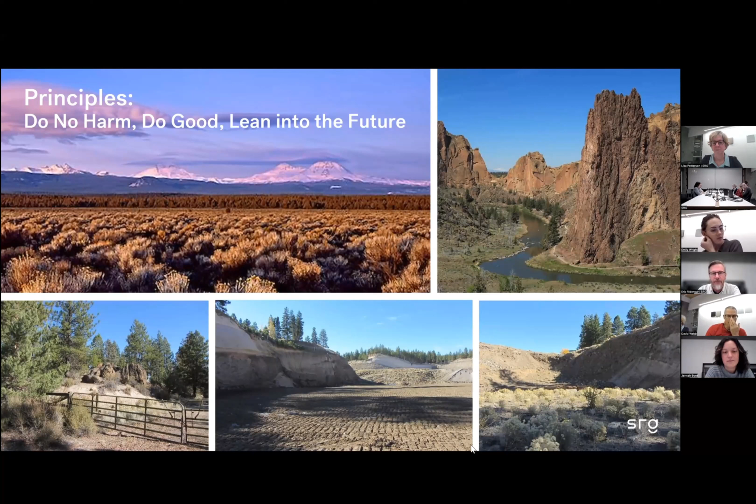I'm going to give you a little background, starting with deep background. Central Oregon, as most of you know, is an amazing place, very unique, very different than the Willamette Valley, both geographically and culturally in many ways. OSU-Cascades exists to be a four-year university for Central Oregon, and it was a long time to get there. I'm going to summarize that story briefly before we get into the specific project we want to share with you tonight. One of OSU's principles is they want to be true to their place, true to the landscape, dramatic landscape you see in the Intermountain West, as well as the site itself, and the images here are representative of both.

So OSU-Cascades has been in Bend since the early 2000s. There were actually courses offered before that by both OSU and U of O. But it's been in Bend as OSU-Cascades since 2001.

But that first decade or so was really just leasing a single building and having a presence on the Central Oregon Community College campus. In the early 2010s is when OSU committed to the West Bend area where the campus is now. They bought one existing building and then started to build this campus.

This is a quick overview of the land housing the campus, which is still growing. It's a relatively young campus in terms of its development as well. So if you think about Bend, it's just west of the Old Mill District and west of the Deschutes River. They started with that little area where you see a cluster of buildings in the bottom corner—about a 10-acre site where the first buildings were built. Even as they were building those, they started to plan through a long-range development plan process for the rest of the lands you see there.

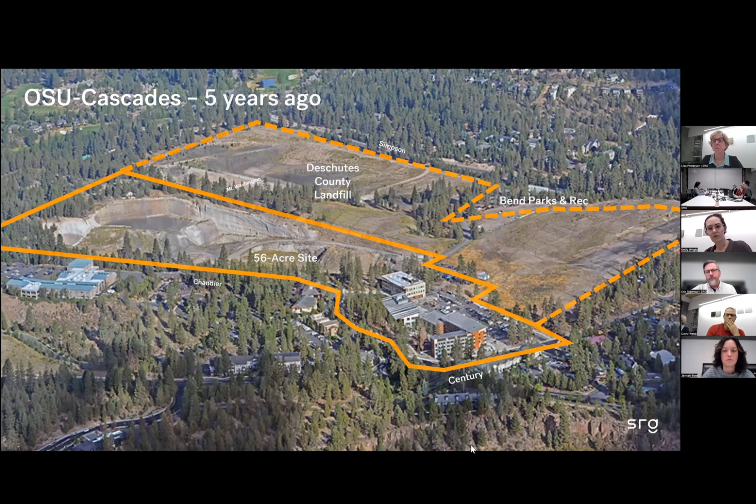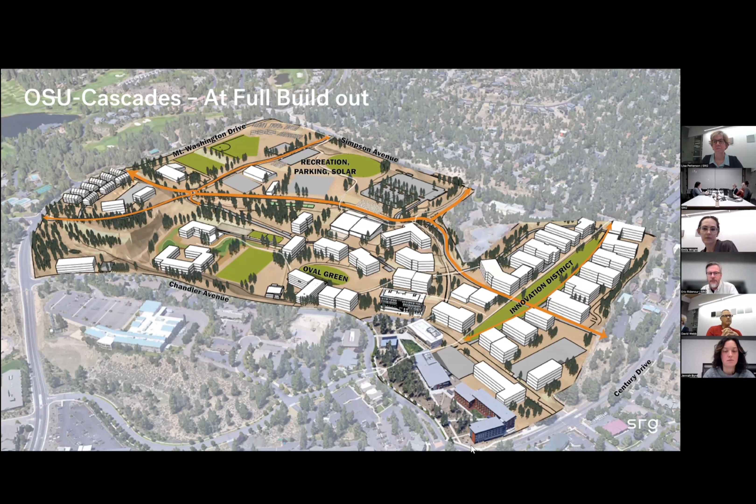This is an image from a similar angle of what the campus might look like as it builds out over time, with that original development in the bottom corner, showing the level of construction it's going to take to house 5,000 students academically and up to 40% of them physically on campus, as well as an innovation district in that right-hand corner.

In the process of working on the long-range development plan—I should say that prior to joining SRG, I was at a prior firm and was part of the team that wrote the LRDP, working with a team led by Page Southerland Page. So I was involved in that part of the process prior to joining SRG about 6-7 years ago.

The two graphics here are both very telling. The one on the left is from a workshop that was all about housing and getting the housing approach right on the campus. The one on the right was about everybody's favorite campus planning topic, getting the parking right. You can't do planning for campuses if you aren't willing to plan for parking. And that was, of course, a concern for the community.

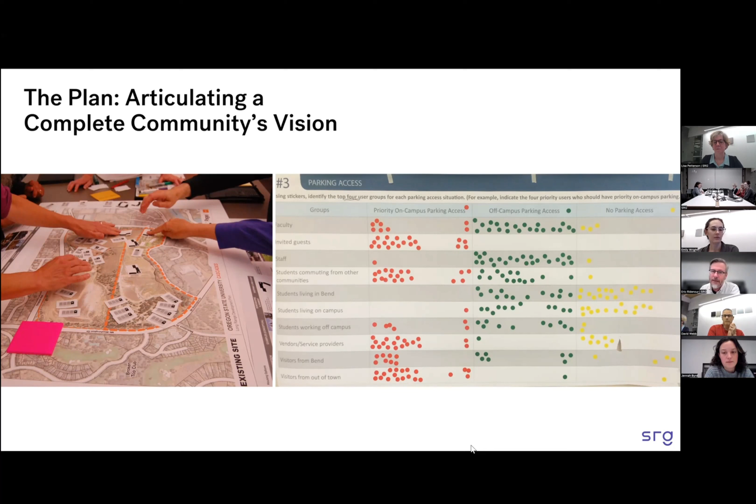I'll just say really briefly, it was interesting because it was a two-edged sword. On the one hand, you didn't want people parking on the neighborhood streets. On the other hand, you really wanted to motivate people to not use cars, so you didn't want to over-provide parking. So a lot of interesting conversations through that lens.

Then there was a robust programming process, which Page really led, to get the program right but not over-program the site. OSU-Cascades continues to want to be lean in their aspirations of how much they build to serve their students.

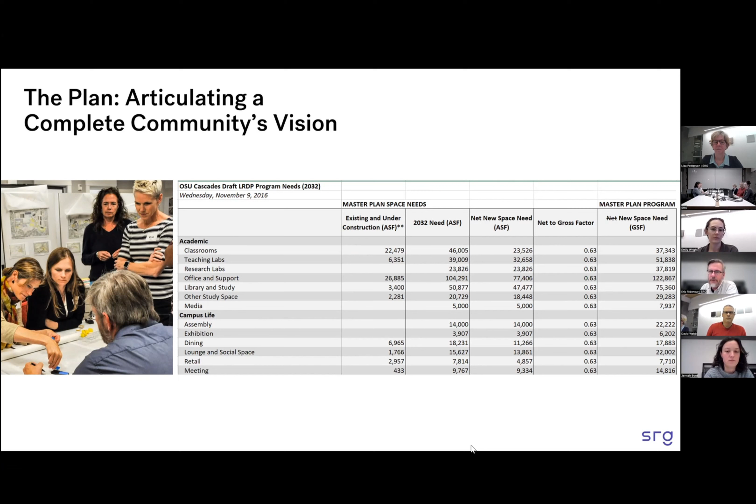They are tracking really well. They sort of adjusted after some post-pandemic trends, like every university has seen, to the point where this fall they have their largest incoming class yet, which is exciting. That was just announced in the last few weeks. You may have seen that.

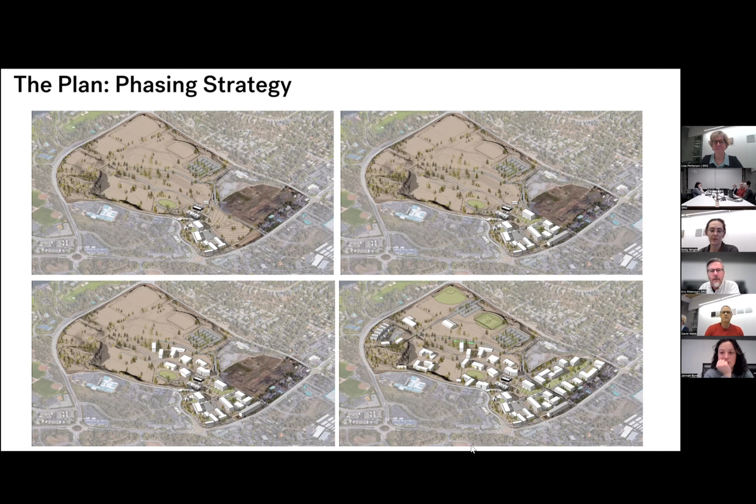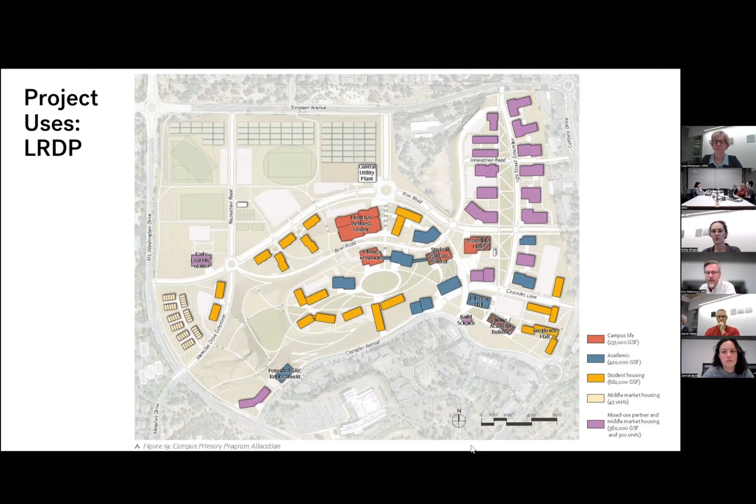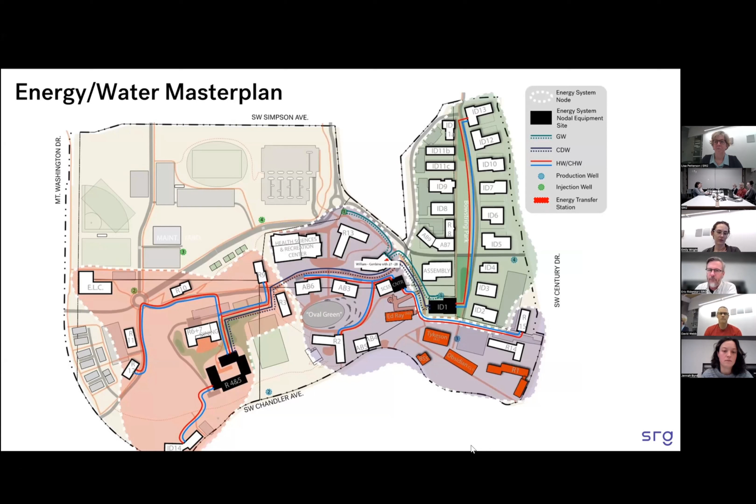The last point I'll make is that they have been very aggressive about what they characterize as their net zero triple goals: water, waste, and energy. They've authored, with Integral Group's lead, an energy study that led to them putting in a geo-exchange groundwater thermal system for the whole campus. The building you're going to hear more about tonight is the first to make use of that. They've also authored a study about what water neutrality or net zero water would look like on the campus, and they're starting to work towards implementing that - for example, introducing purple pipe and systems like that to be ready for water recycling.

At that point, I'll transition it to the rest of the team.

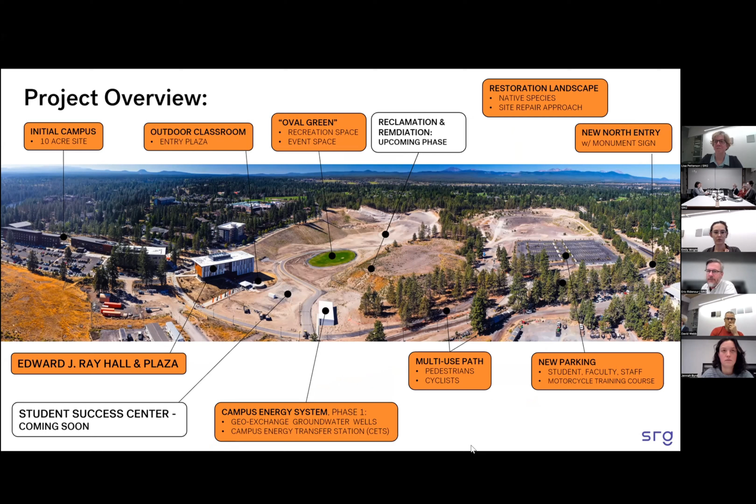Thanks, Eric. So with that background in terms of where we were building and the context of what was happening, I wanted to remind everybody, because many of you on this call might remember, that this particular project came out as a design competition RFP in late 2018, and the competition spanned over the Christmas break and into 2019.

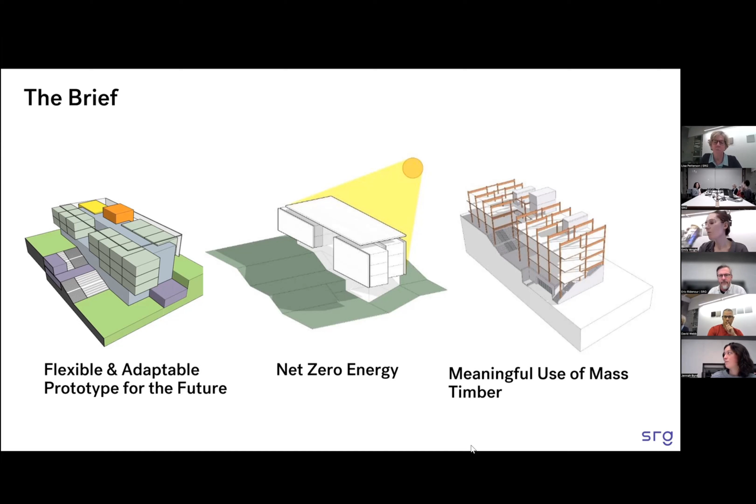The brief that OSU came up with was really around three big topics. They wanted a project that was flexible and adaptable, that would serve as a prototype for the future. They wanted to demonstrate that net zero energy goal Eric mentioned could happen on this building, so it would prove as an example prototype for the campus. And they wanted to incorporate what they called a meaningful use of mass timber - but they didn't really talk in the brief about what was meaningful, so that was always a big question, probably for all of us.

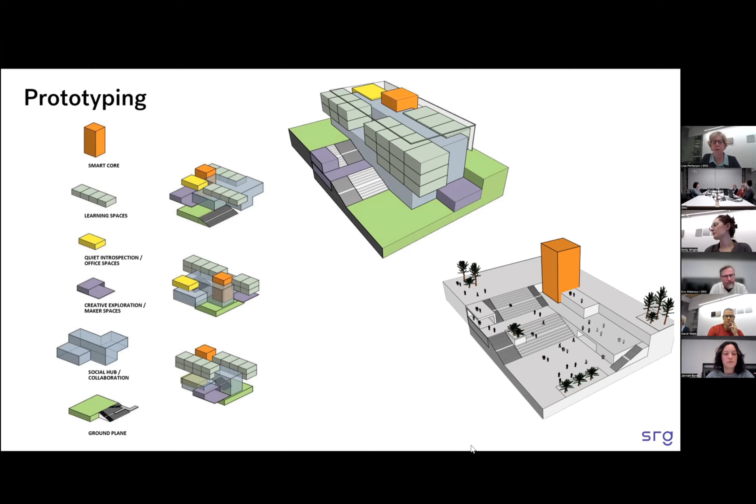So one of the ways we started was thinking about how we could take this concept of prototyping and make sure we incorporated it into that early design thinking we were doing in the competition. This is actually part of that competition entry - how could we think about the spaces that would be incorporated, and how could they change over time? What would be the fixed elements and what would be the adaptable elements?

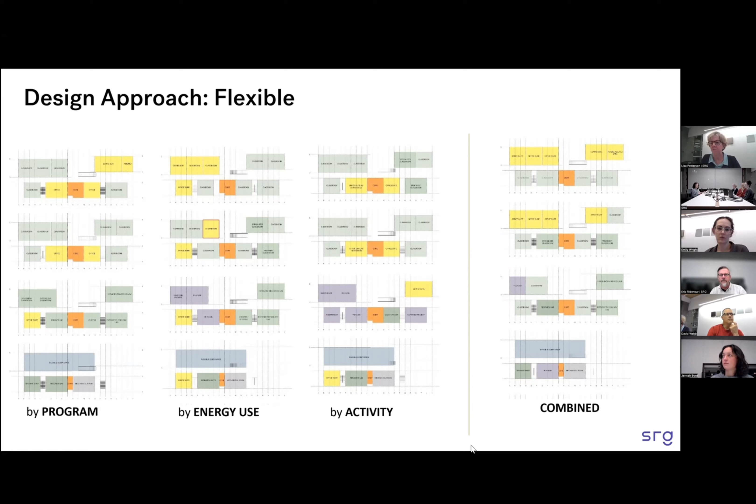We also wanted to take it a step further and think about programming, and how the building blocks of the actual program could be thought of in different ways to take advantage of that net zero energy goal. So this is what the team calls the quilting diagrams - thanks to Jenna for making these. What they're trying to show is different ways to think about how you would program space: what are the adjacencies, do you have them adjacent by program within the facility, do you have them adjacent based on what makes most sense from an energy use perspective, or do you look at it more from activities - what needs daylight and what doesn't. And of course, that leads to the net zero energy approach.

Eric's already spilled the beans about the geo-exchange system that Integral Group eventually led. But at the design competition, we didn't know that was an approach - we just thought it would be a really strong solution, and so we were even incorporating it in that.

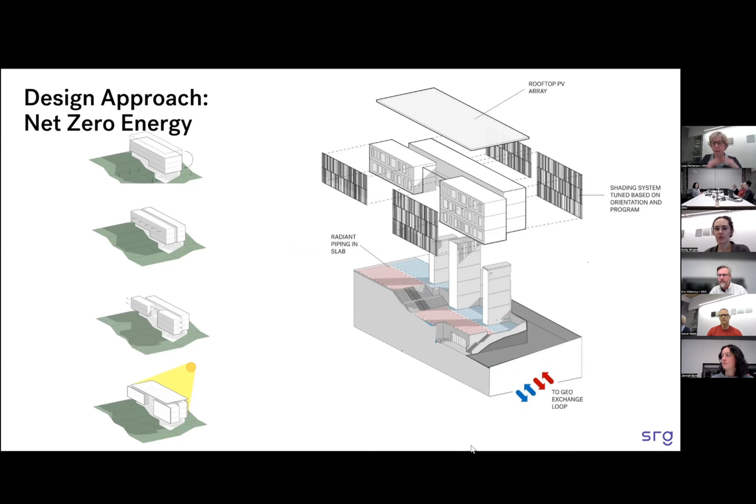Incorporating radiant slabs, looking at how we could have a carefully tuned facade, and of course looking at the roof and what the roof would be able to do to achieve that net zero energy goal. We'll talk more about that later in the presentation.

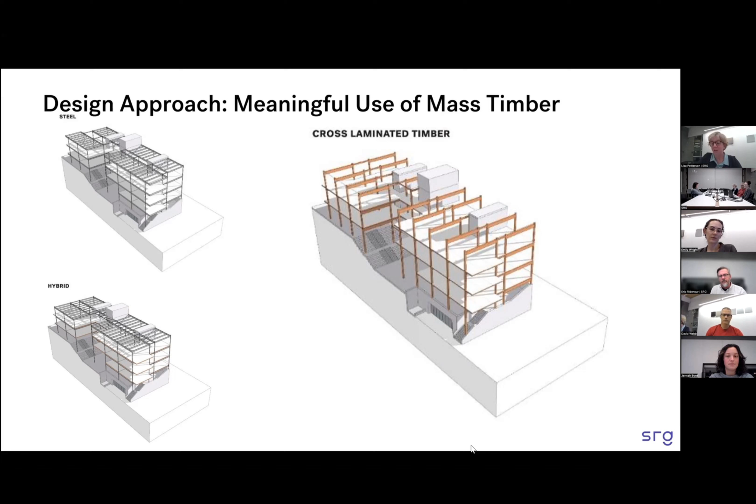I'd say the meaningful use of mass timber was probably the thing that changed the most from our competition entry. We came into the competition thinking a hybrid approach with a steel structure and CLT decking would be the award-winning approach. Shortly after the design competition, OSU went out for a separate selection and selected Swinnerton Builders, and we learned from them that actually the most economical solution, because of the tolerances, was an all mass timber solution. So that checked the box for meaningful, at least for me.

One of the interesting things as we learned more about Central Oregon was how you talk about mass timber in different regions—it varies a little, especially at that time. In Central Oregon, we talked about it supporting the regional economy and the speed of construction we were able to see. We didn't talk so much about carbon sequestration—OSU was interested, but they said maybe don't talk so much about that. Of course, we talked about improved daylighting for users, the idea of a renewable resource, and that biophilic response. Those were important to the users as well.

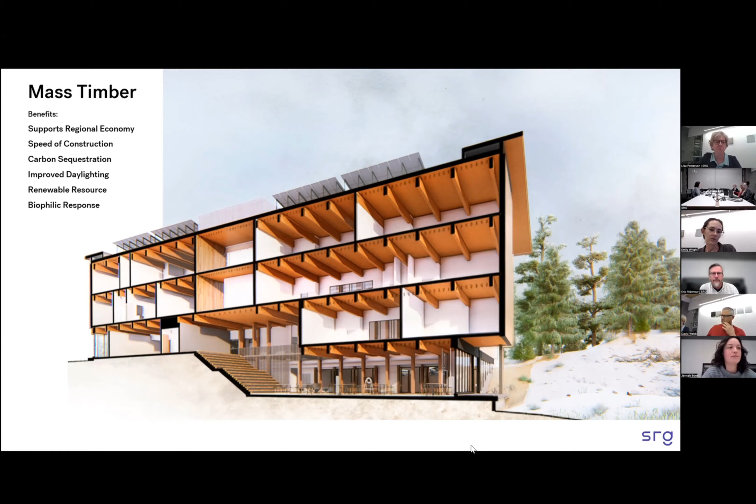Ray Hall was designed to serve the STEAM disciplines—science, technology, energy or engineering, art, and math. The building has classrooms, maker spaces, labs, research spaces, offices, and collaborative space. Like Lisa said, we were designing for maximum flexibility, so the furniture and equipment are all movable or adjustable.

A lot of the furniture is not fixed in many of the lab spaces, which allows us to move things around and think about the future of the classrooms.

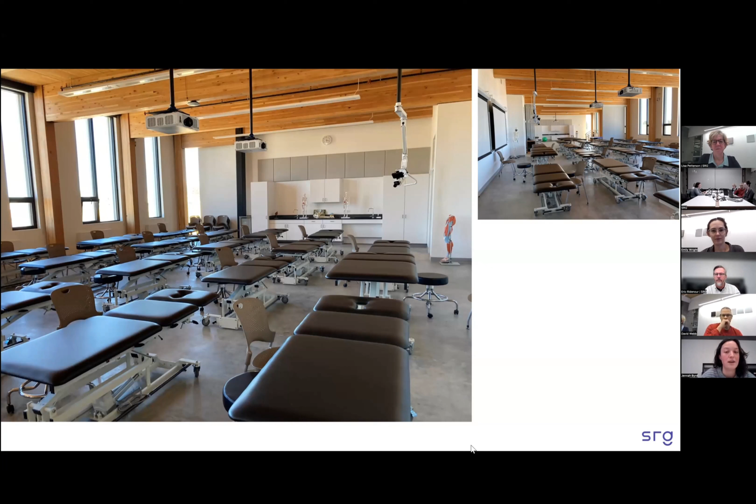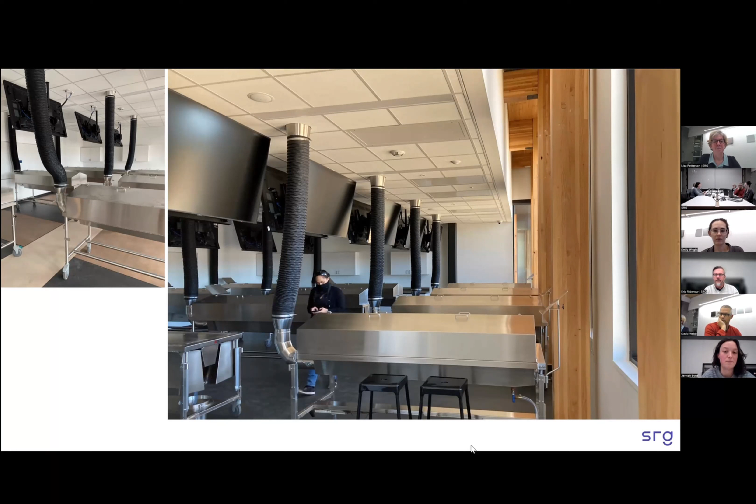This was one of the most challenging spaces to design for, like what Lisa was showing with the stacking diagrams. This space was hard to design for because of the energy use—it was pretty energy intensive, and there were security concerns. So when we were doing these diagrams, we ended up placing it on the top floor to shorten the length of the mechanical systems, and for security, to have fewer people on the fourth floor.

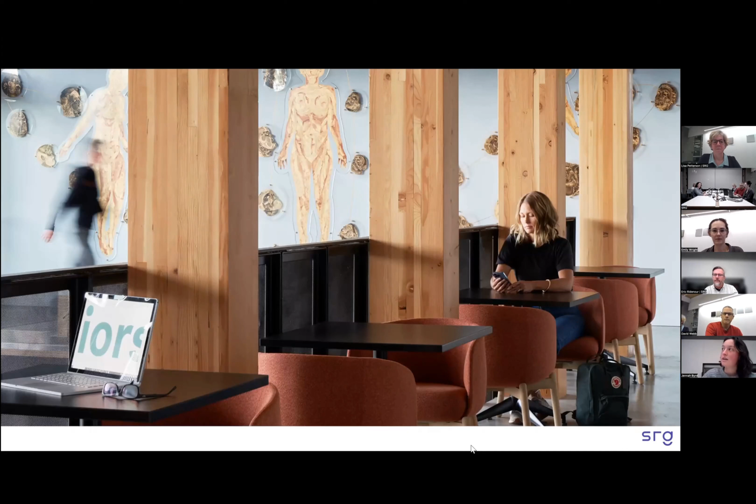This is another one of the casual seating places for people to just meet outside of the offices. There are other offices, but you'll see those later when we get into interiors.

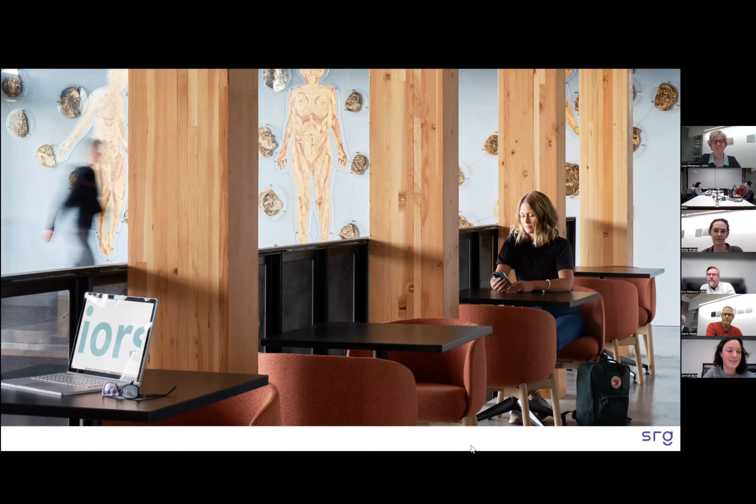One of the things Lisa talked about was the meaningful use of mass timber. We took that initiative to heart, and we were concerned that if we buried the structural columns within the wall, we wouldn't see them. We wanted to pull them inboard, and one of the conversations we had was how to achieve a 3B building, since the exterior bearing walls in the highlighted B column needed to be 2 hours.

So we pulled those structural columns inboard of the exterior wall. They're supporting a cantilevered CLT concrete composite deck above, but the exterior walls are not load bearing. This achieved what we hoped to do, and it also gave us a nice pathway to run utilities for the sensible fan coils between the exterior face of the column and the wall, running the hydronics through without having to go around the column. It was a pretty slick way of moving one little element to achieve what we hoped for aesthetically.

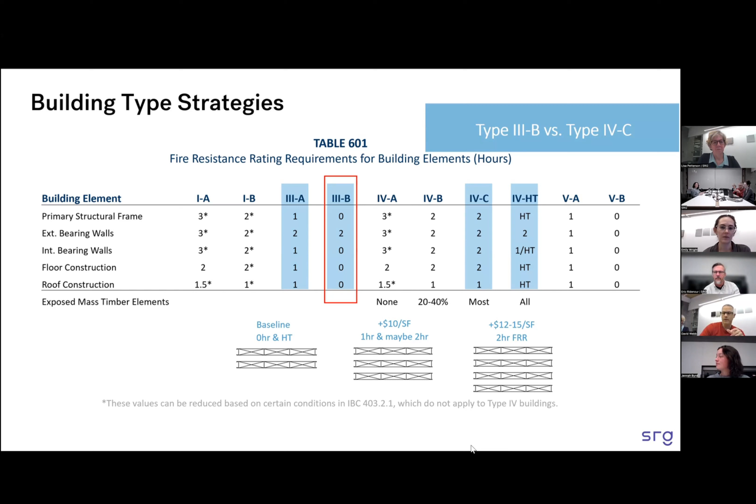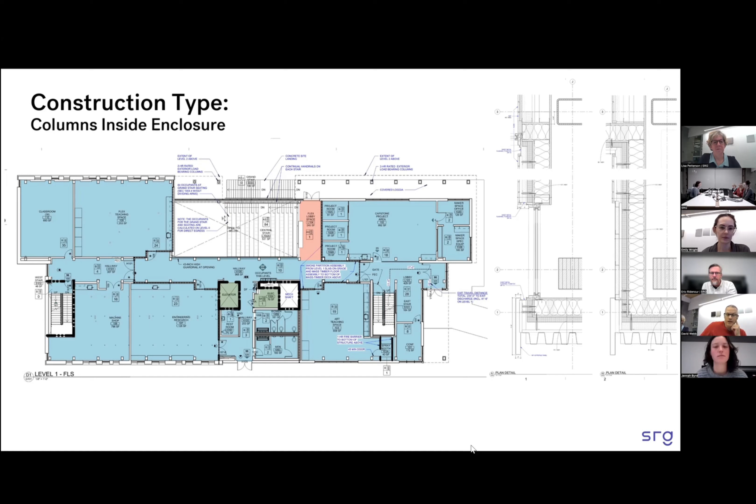In the larger diagram, you can see that most of the building is considered a B occupancy for educational use, although we have some fairly large assembly spaces, which we'll get to, that we wanted to create A spaces.

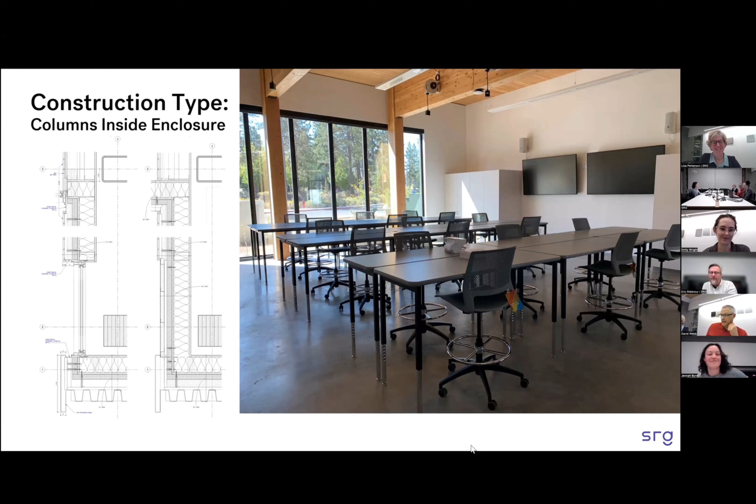In this image, you can see the columns that are pulled inboard supporting the beams clearly. It's really clear how the systems work, even to people who aren't engineers. This was where we were going with keeping the wood as honest as it could be - meaningful use of mass timber, both in structural need and for the beauty and aesthetics of the wood.

In order to do that, we had to understand how to protect the building from a fire rating standpoint. We actually wrote an alternate means and methods to control the smoke and the ratings without completely encasing the CLT beams and columns and the underside of the deck. We had some friends help us write this, and we presented it to the jurisdiction before permit submission, so it was agreed upon before we went forward. It was a pretty clean way of dividing the building up by use.

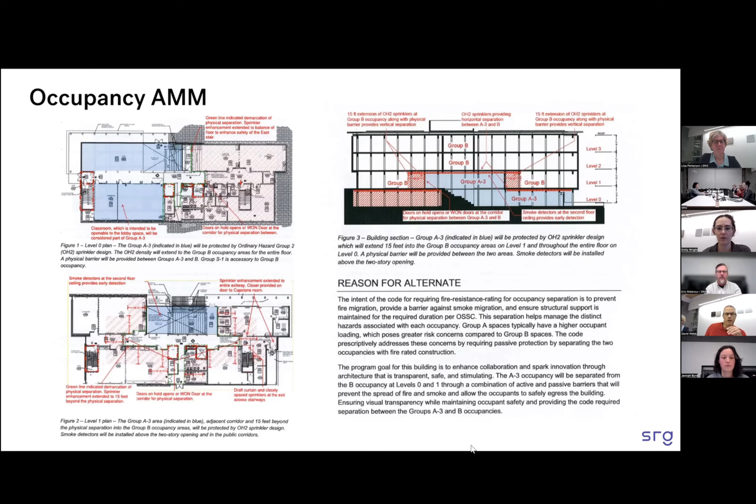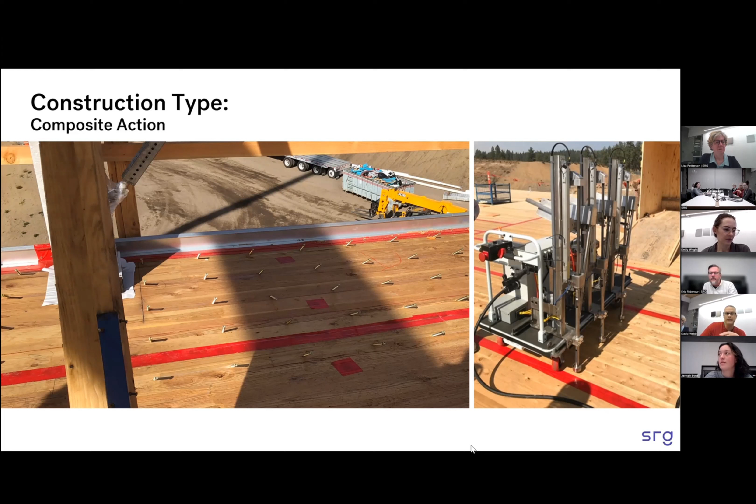It's a 4-inch concrete with conduit, and it also has all the rebar in it. So it's pretty heavy duty, but it was also a pathway for us to run utilities on top of these CLT elements.

On one of the projects I'm working on now, we did not have this, and you can really tell in the lab spaces.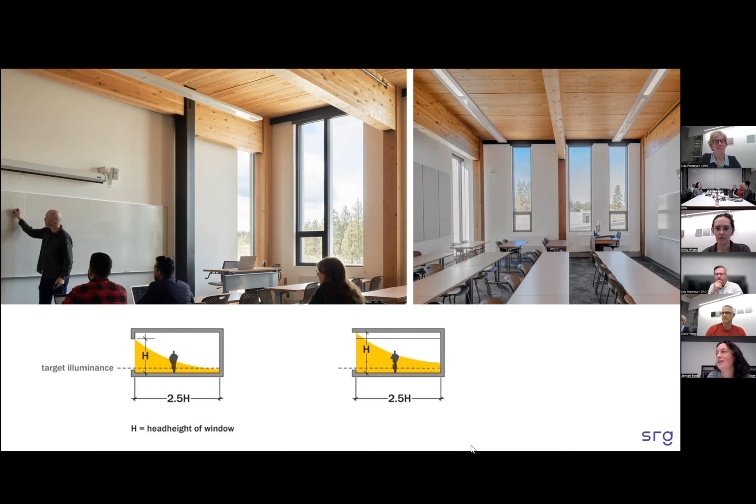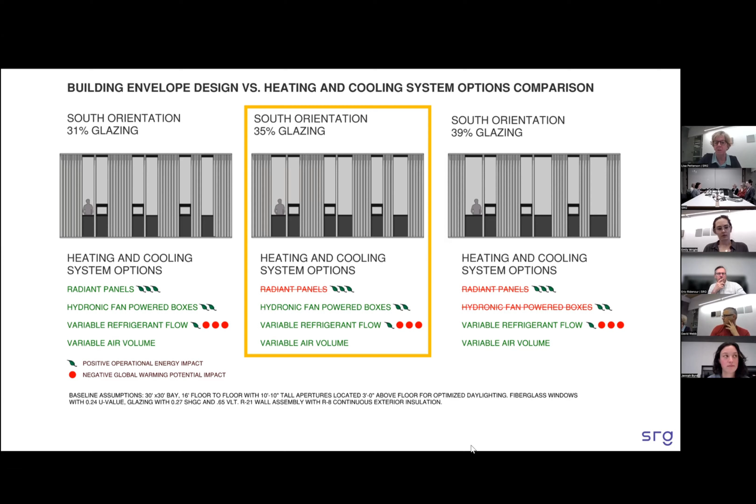One of the interesting things we were able to do, at the same time we were using the Design Explorer tool that Jenna described, was that because we were using a CMGC process with trade partners involved, we could determine what mechanical systems would work with each of the different percentage glazings. Jenna mentioned we decided on 35% based on daylighting metrics. Then we asked: is that going to give us enough flexibility from a mechanical perspective for three systems? Radiant panels turned out to be the one system we couldn't use everywhere.

This diagram shows where a radiant system is required because of the loads. Two areas were significant: the large space we showed earlier, with the potential of up to 200 people in a TED Talk area, and the cadaver lab. By putting the cadaver lab on the roof, we incorporated a direct exhaust system, and by putting the TED Talk area on the ground floor, we incorporated radiant in the slab, achieving that as well.

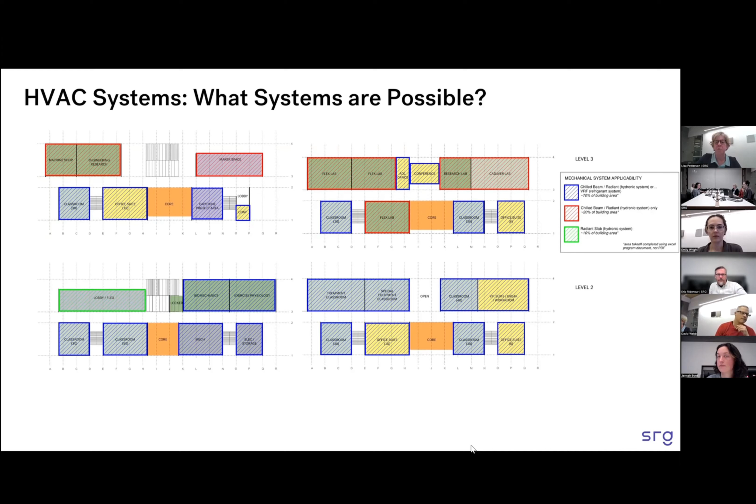It was also important to be able to use the geo exchange system that Eric mentioned earlier. This diagram is very high level, but here's a bit more on that.

The system OSU selected is a nodal system, meaning that over the long term, as the campus builds out, there will be as many as three or four sets of wells—one extracting the water, one re-injecting it after it's been through heat exchangers. Each of those pairs of wells and heat exchangers will serve a node of the campus.

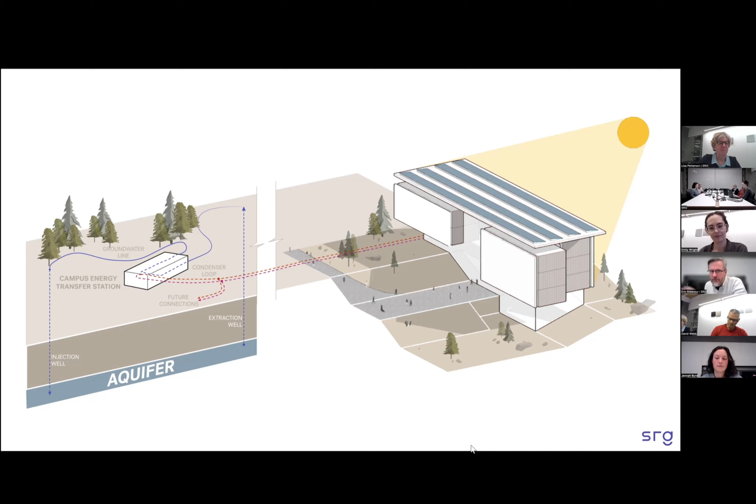There's a temporary building called the Campus Energy Transfer Station a little distance away from Ed Ray Hall, where those pumps are sited. The long-range plan anticipates that in the future this temporary building goes away and these pumps become a ground floor or basement use of a future academic building, so they get embedded in future growth. But Ed Ray Hall was the first building to take advantage of that heat or cooling source from the groundwater.

When designing a net zero energy building, you work from both ends. You ask: if it was a typical building, what would the energy utilization intensity be? Because of the mix of program—with cadaver labs and energy and environmental studies labs—it's higher than a typical classroom, at about an 80 EUI.

All of the things the team has mentioned—the great daylighting, the geo exchange, the parametrically designed facades—got us from the 80 down to a 37.2. It would be too big of a roof to really achieve OSU's goal of demonstrating net zero energy on the building.

So the next step was looking at operational strategies, and then additional energy conservation measures that would get us down to an EUI of between 26 and 28. Actually, the client told me today they're operating with an EUI of 26 right now, which was pretty interesting.

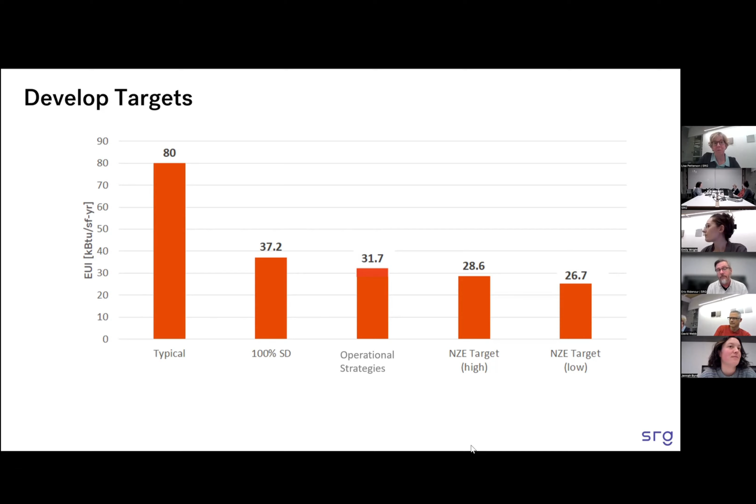Here's the slide that shows the detail. One of the great things about working with the trade partners and our energy modeler AEI was being able to show the client the consequences of each of these different operational strategies. If they agreed to an unoccupied temperature setback, that would be an EUI decrease of 2.2, helping reach that overall goal. If they wanted to expand the range, it was 1.1, and so forth. We went through each strategy and got client buy-off by showing them the potential savings if they agreed to incorporate it.

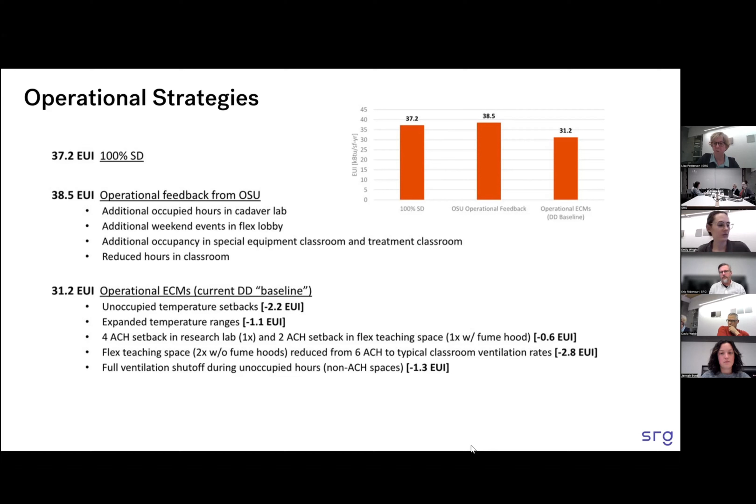For that last piece, we did something I've never done previously in my career, which is figure out what the first cost per EUI would be for each of the different strategies.

We had set aside a pot of money in our overall cost estimate. Then we worked with the trade partners and our engineer to figure out how much EUI savings would be associated with each of these measures, and developed a first cost per EUI, so we could go to the client and say, do you want to incorporate these or not?

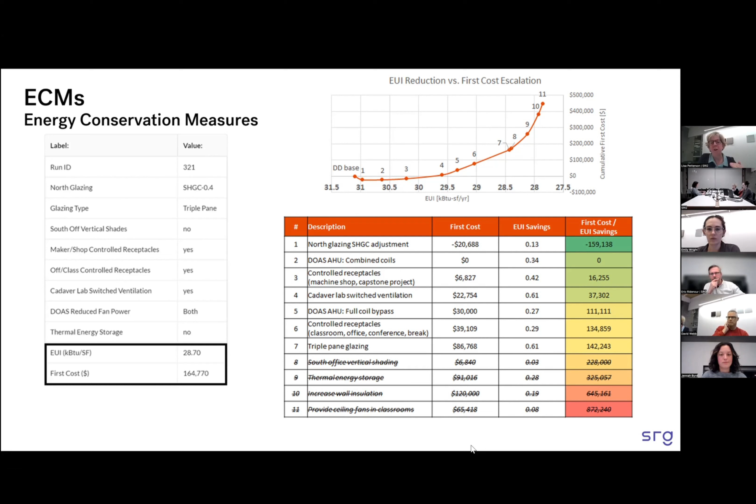The first one, changing the solar heat gain coefficient of the north glazing, actually had a lower first cost, so it's kind of a no-brainer—we should absolutely incorporate that. Ultimately, we incorporated all the way down through number 7. We did not do number 8.

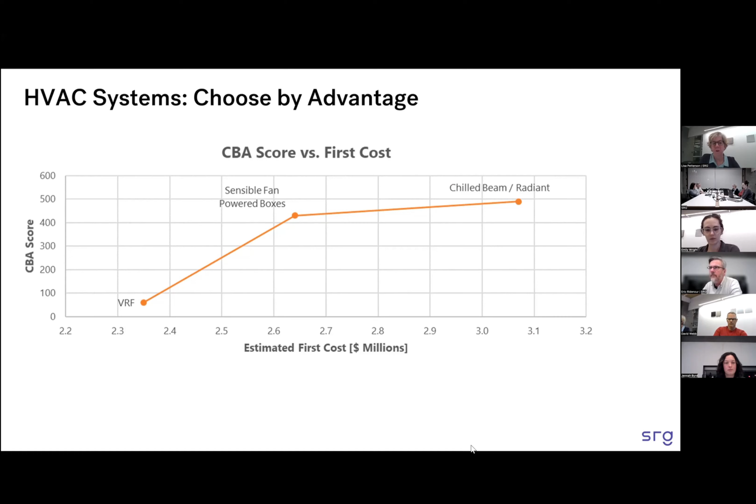What you can see is that the sensible fan-powered boxes almost scored as high as the chilled beams, but were significantly cheaper, so ultimately that's where we went. It was also a great system for incorporating within the mass timber. Here you see the mechanical in the corridor with the beams, going into the actual fan-powered boxes on the perimeter.

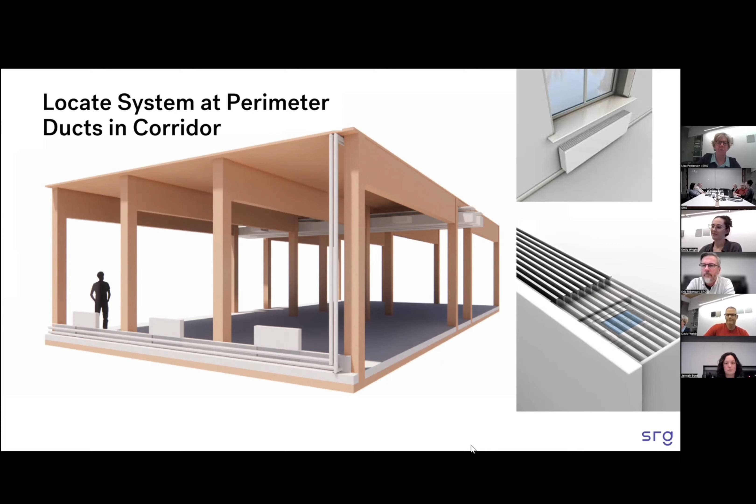Moving into the interiors, I think we've talked a lot about the technical aspects, but another big piece of this meaningful use of mass timber was, if we're going through all this energy to have it in the building, how do we really highlight it and create it as a focal point? Also, create spaces that feel very comfortable to be in and really connect to the surrounding environment, with a really unique setting being in this former pumice mine. We wanted to be mindful of how you create those connections and biophilic feelings within the space.

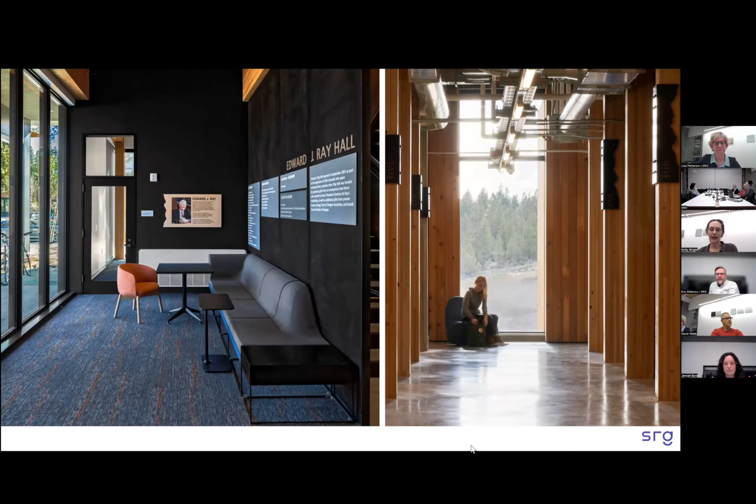Throughout the building, we really looked at highlighting the height of the wood in spaces, the big access to natural daylight, but also creating elements that gave you a sense of place throughout the building, and overcoming challenges of when you have a hallway full of these timber columns. It turned out you couldn't tell where any of the doors were located, so those were some of the puzzles we worked through.

But again, really highlighting that wood as the main material, with everything else being secondary to that. We were also mindful about where we were able to bring exterior materials into the interior of the building, again highlighting that wood—that was another important aspect. Those areas are also where we're creating connections between the exterior space and the interior building.

One of the main areas of that is the central stair we talked about a little bit. This is at the end of that large flex space. Again, really wanting to connect to that exterior, so you can see how the stairs are mirrored on either side. But what was really special about the interior of the building is that in addition to the CLT as mass timber, the team was really interested in utilizing mass plywood as a locally sourced and kind of new mass timber product.

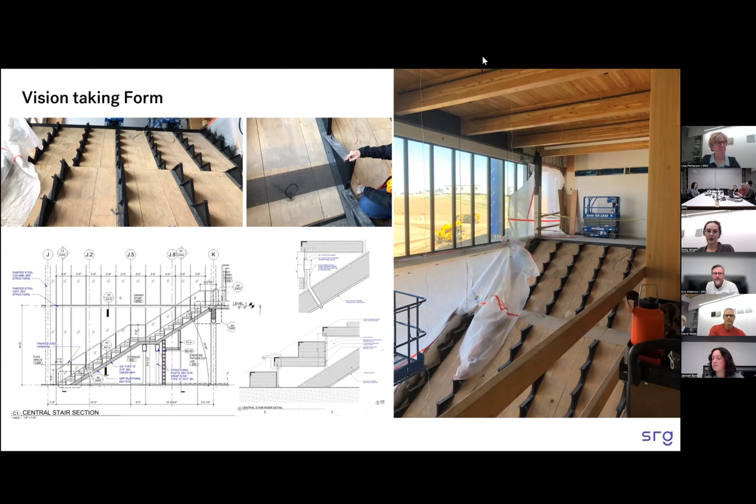We really wanted to challenge ourselves to think about how we could use that mass plywood in a way that was unique to its qualities as a material, and highlighted its aesthetics, having that really unique large mass ply edge. The mass ply itself creates the structure of the central stair, and those additional planks create the benches you see built up. It was a really unique structure and way of doing it, allowing that plywood to be both visual and structural within the space.

We also highlighted that ply edge—I think that was something we were very interested in, as well as bringing in some of the other materials, like the perforated metal and structural steel incorporated in other parts of the building, really bringing that into the showpiece in this flex lobby space. There were some interesting things we went through with that stair—practically, we found out you could see through these black mesh risers, for lack of a better word.

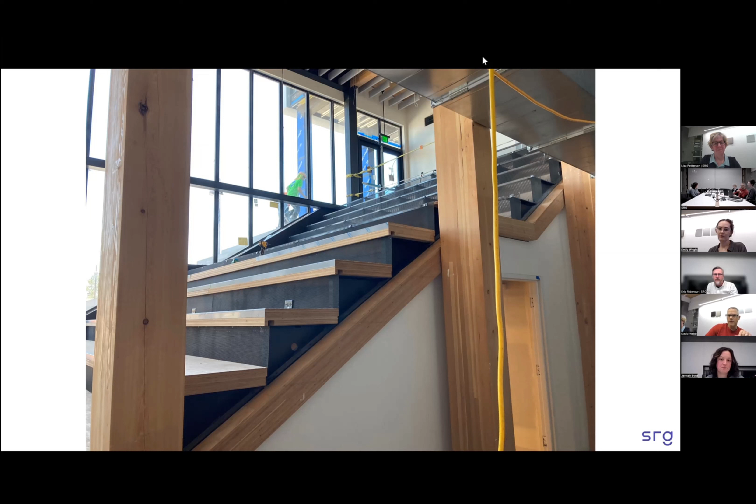You could see the sloped plywood and all the dust and every conduit that ran to these little power sources. It was a development of an aesthetic idea we had to work through with our trade partners. We ended up painting a flat black on top of the sloped mass plywood panels to hide some of that stuff, which really let the edge of those mass plywood panels sing and be the focus of that stair. It was a very interesting development we all worked together to solve.

Along the way, we found out we had a design hope that the ceilings within the classroom spaces and any of the outboard rooms along that main double-loaded corridor would be clean, to express the wood. That was meaningful for us, so the only elements we wanted between the beams were sprinklers if needed, and the singular light fixtures.

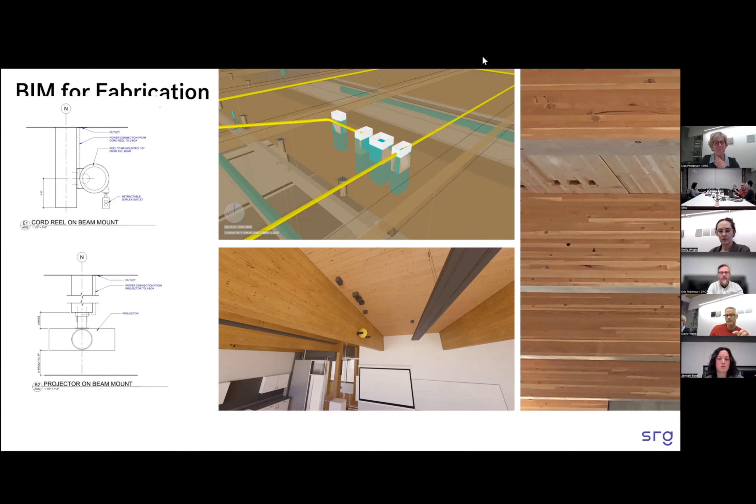So in that vein, we had to really coordinate with the building teams and trade partner teams, using our BIM models and bi-weekly meetings to run through coordinating where every element went. What you see in the top picture is conduits and junction boxes sitting in the concrete composite deck on top of the CLT, which was our pathway to run data and electrical power.

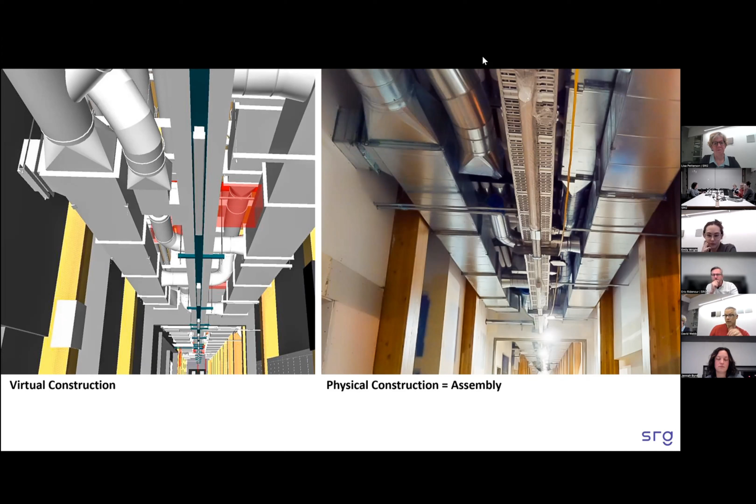The last thing is about these wood frame connections. The city of Bend had not built a building of this scale using mass timber as a structural member, so they were a little unsure of how this product would be used. We were able to bring Katina, our structural engineer, down for a pre-construction, pre-application meeting to walk through with the city of Bend and their third-party reviewer how this was going to be proposed. Once that was walked through with them, they seemed to have the light bulb go on that this was really doable and made lots of sense.

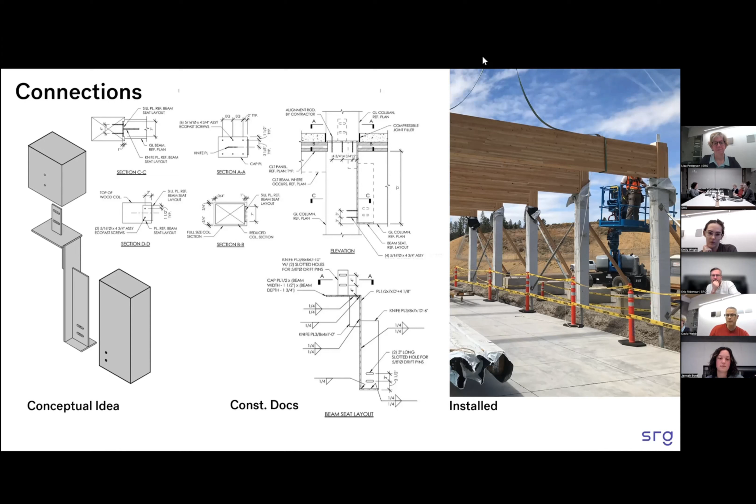The last chapter of our story is really about the actual mass timber and the suppliers. We were able to procure our mass timber through about the 20% construction documents, so we took advantage of the companies you see here. Zip-O Laminators provided our glulam columns and beams, Freres was the mass plywood for the stair David and Emily just talked about, and Vaagen provided the CLT.

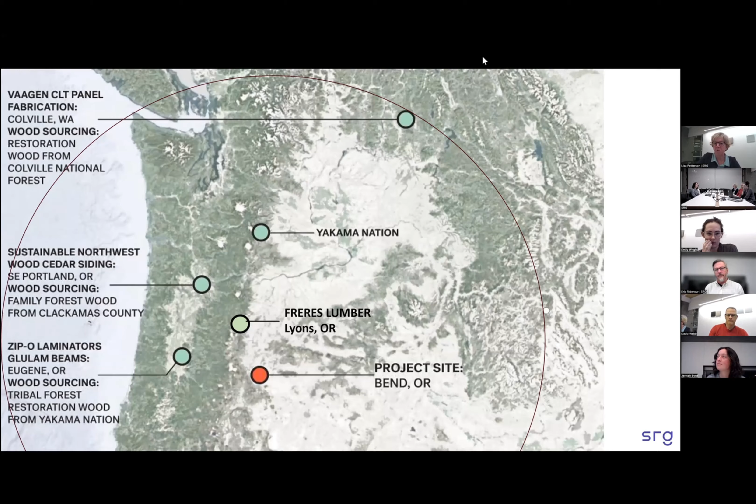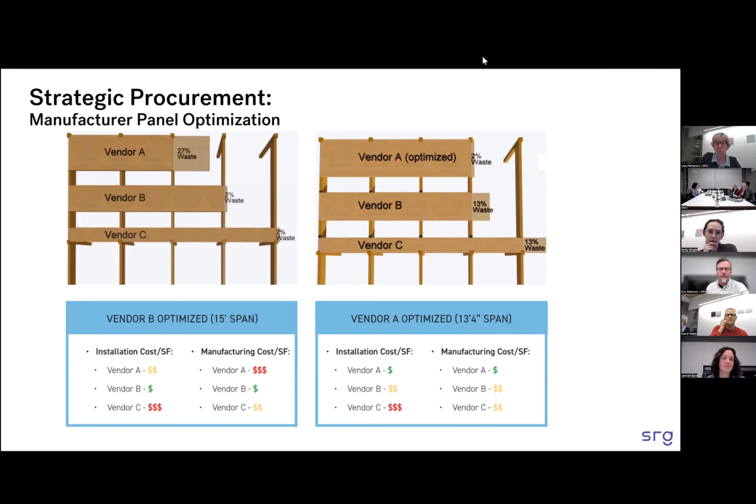We didn't really plan it, but while doing the LEED certification in terms of looking at how far things were sourced, everything was within about a 500-mile radius, which worked out well thinking about this as a regional building. One challenge was thinking about how the different vendors, since it was bid, had different panel sizes that would interact with the module. Jenna talked about the 10-foot module—some manufacturers hit right on it with maybe 2% waste, but others could have significant waste. When you think about all the different panel sizes available at that time, and there are more now, you notice a large difference.

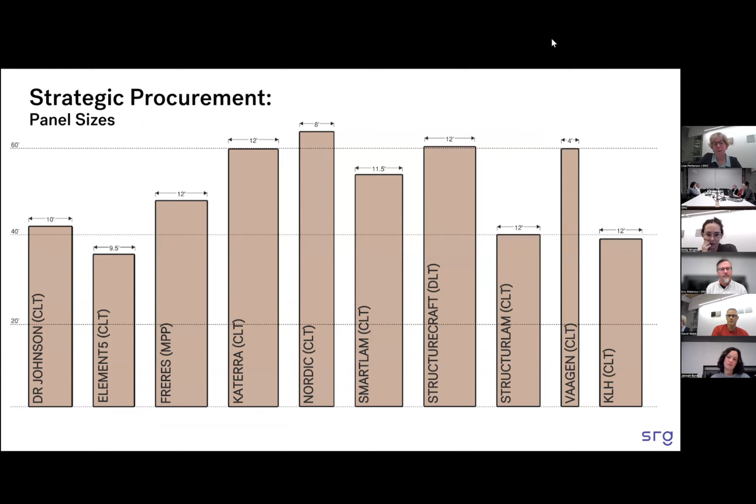One in particular probably stands out to you—the really skinny one on the end, or next to the end, is from Vaagen, and that was an interesting change to make once in construction documents. One thing we learned after that selection is we couldn't penetrate with any mechanical, electrical, or piping within 4 inches of either side of the joint, so all the white areas on the bottom diagram are places where pipes can't penetrate. You also notice a significant quantity more panels, and you might wonder if we made a mistake in thinking just about the cost of the panels versus the erection.

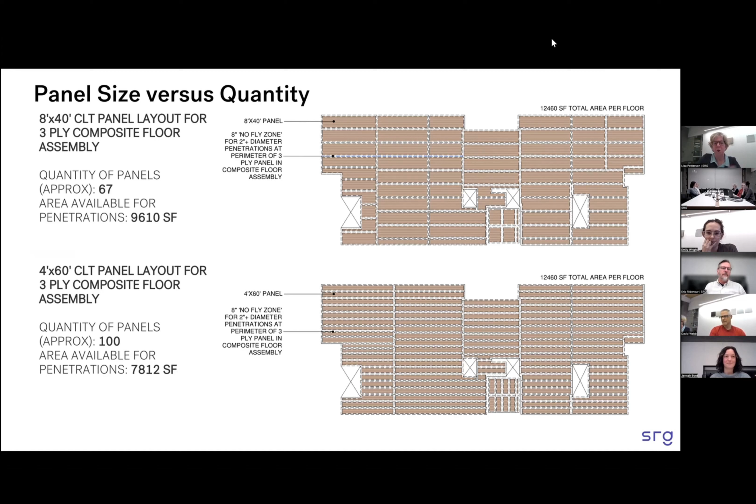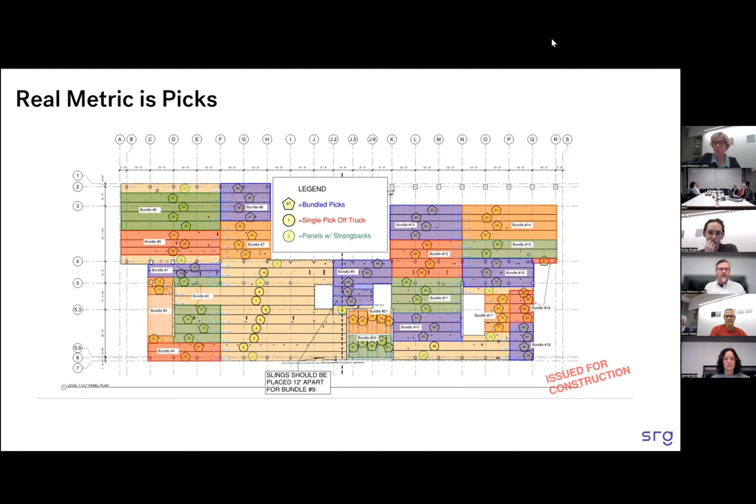The real metric in terms of erection is really how many picks you need to do—how many times you need to take the crane and lift it onto the building itself. This diagram was created by the trade partner, and each different color shows a different pick. Because those panels are less wide, they can actually stack multiple panels, do a single pick, lift up to 4 or 5 panels, and then just shake them into place.

Ultimately, we were able to get to doing a floor in less than a week, which is pretty fast for an overall 12,500 square foot floor plate.

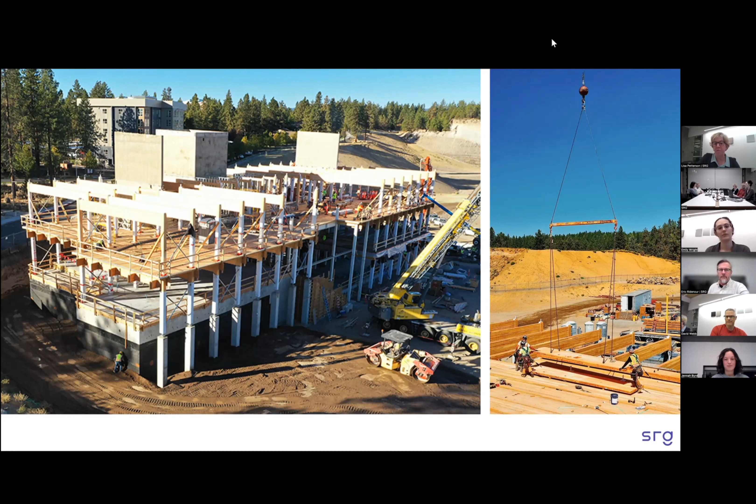But perhaps the biggest sustainability metric that struck me is how long it would take American forests to regrow all of the wood in the project. I'm talking about the glulams, the CLT—all of it would be grown in 3 minutes. And this is forests that are actually in production.

We also took a look at embodied carbon. I know we talked earlier that that's not something we discussed essentially in Eastern Oregon, but we wanted to understand the metrics around embodied carbon. As we did our structural analysis, we looked first at the 13-foot-4 column spacing that needed a 5-ply, then going to the 10-foot column spacing and a 3-ply—that was a 25% reduction in wood fiber, which is a good reduction in overall embodied carbon, reduces the weight of the building, and also reduces the concrete in the foundations.

After the fact, we asked ourselves: what if we hadn't done concrete slabs? David talked about the need for them, both from a jurisdictional perspective and for embedding the electrical and conduit. But if we had chosen a raised floor system, we realized there would be even more reduction in wood fiber and even more reduction in concrete. So this was done after the fact.

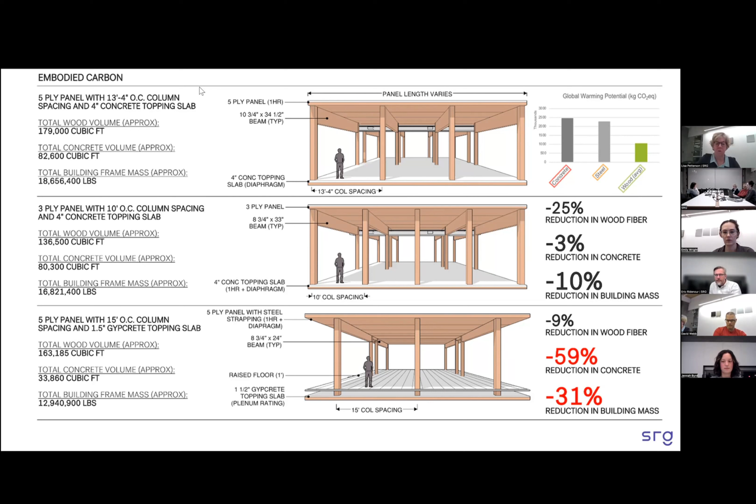The last piece I'll talk about is where the overall timber came from—thinking not just from that 500-mile perspective, but also where the logs are actually being harvested. Are they being harvested in a way that restores timber, as Vaagen is doing? Are they being harvested on tribal lands, contributing to social equity? So we worked with Sustainable Northwest to understand how much of our timber came from these different sources—about 50% from the Yakama forests—and that's one great metric we talk about.

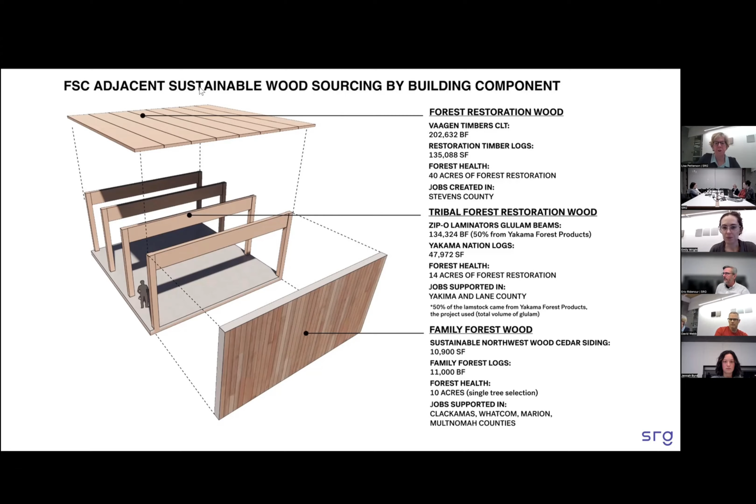As most of you experienced in these last few years, we as a team had to go through some challenges within the building construction sequencing. The big nasty ball in the front end of our scope is COVID. We broke ground at essentially the worst possible time. One benefit was that we had a whole lot of laydown space, so you didn't have to be right next to anybody when doing your work as a trade partner for quite a while—that did help.

There were some challenges with the fact that a lot of the trade partners were traveling to Bend from larger regions, so the general contractor had struggles controlling the spread of COVID when they were off-site. That was just a cultural thing we had to battle with.

We had a bit of a wildfire season not too long after that, where we experienced a lot of smoke and actually lost some of the product we were looking to source. Compounding that, one of our presses broke down at the selected manufacturer. It was a wonderful story that these could be competing market players actually worked with each other and our trade partners, bringing product to another manufacturer to have it pressed, since the first one's press had broken, to get the product delivered to the project on time.

We had a change with the interface of the city of Bend—they changed platforms for submitting drawings in the middle of the project. So there were lots of fun little challenges. In the end, I think we missed our hoped-for completion date by about 5 or 6 weeks. Given all those challenges, we still think that was a pretty successful navigation through the process.